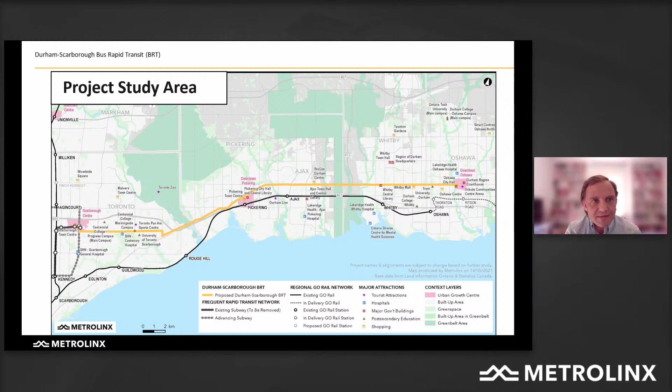Just to explain the concept behind the acronym BRT for Bus Rapid Transit: the objective is to provide dedicated lanes for the buses where this is feasible. The key here is both to be able to have shorter travel times, but mostly to increase the reliability of the transit service. We know reliability is key for a number of users.

That reliability also enables frequent service. So we're looking at a 5-minute frequency during peak hours, which can be really on the dot and provide a bus strictly every 5 minutes, not sensitive to bus bunching or things like that which would alter the quality of service for customers. Along that, there's a number of enablers that support that, including smart signals, and also a lot of connections with other TTC routes or DRT routes that will be feeding into that east-west corridor.

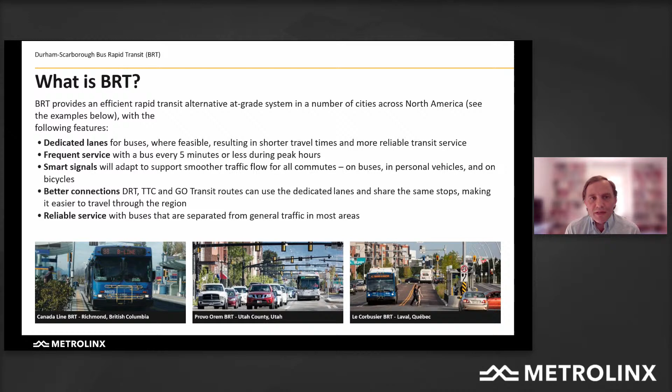As I mentioned, this has been in the works, at least on paper, for some time, and really ties in with a number of other planning exercises led by the city of Oshawa and its own integrated transportation master plan, and by Durham region. So the objective is really to provide that infrastructure spine to support the mobility hubs and the urban growth center in all of the towns that the BRT crosses in Durham region.

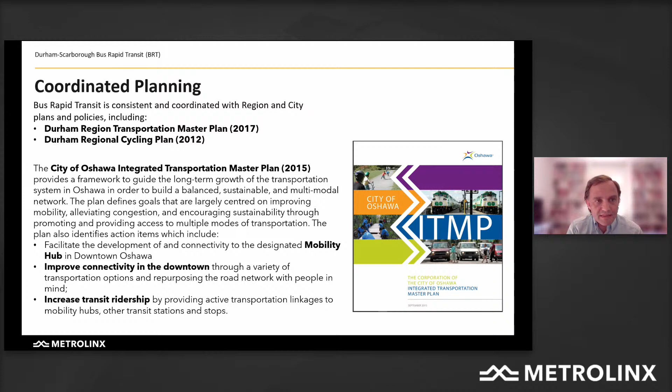The other benefit is the reduction in average bus delays. That's the reliability piece - trying to make sure that if you have a bus every 5 minutes, you basically only wait for a bus up to 4 minutes maximum, not more than that. So you won't end up having buses stuck and waiting for them for 14, 15 minutes, which is particularly important in the winter months, as we know.

There are some other benefits, such as the amount of greenhouse gas emissions that will be reduced because of that. With different forecasting models based on real demand across the region, we expect 162,000 tons of carbon dioxide to be reduced because of people choosing transit over cars. And the final benefit we focus on is the safety benefit - looking at developing solutions all along the corridor to reduce traffic accidents and injuries.

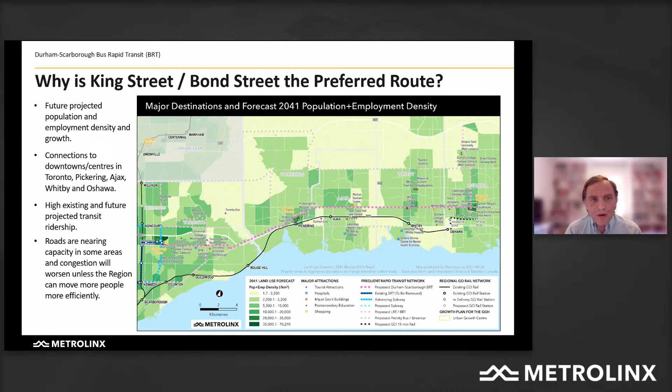And it's also supported by current ridership data. For the next slide, I'll pass it over to David to tell us more about the ridership.

Thanks, Mathieu. Based on the growth and densities Mathieu was just talking about, the two images shown here represent the current and forecasted ridership numbers on key routes in Durham. While routes like Rossland and Taunton do have considerable ridership, and future high-frequency transit routes planned on them, the highest growth in future ridership will occur along the Highway 2 and Simcoe Street corridors. These two corridors are really the proposed anchors of the transit system in Durham region and require dedicated transit infrastructure to meet the ridership demand shown here.

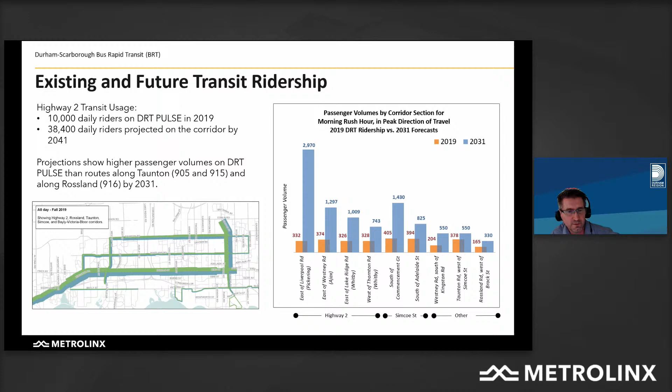While this study is looking at BRT on Highway 2, the Region of Durham will also be commencing a visioning study and environmental assessment later this year to study rapid transit on Simcoe Street. Please keep your eye out for notice of this study to get involved. Next slide please, and I'll pass it off to David Hopper.

Great, thank you Dave, and good evening everybody. So on this project, we've been working with Metrolinx, the region, and all the municipalities for a couple of years now. We started with the first round of engagement looking at the overall project plan, moving through some concepts for the corridors, and working our way down to a preferred corridor, which is where we are now.

We're getting close to a draft Environmental Project Report that is now being circulated with the various ministries for review, and that will launch our formal TPAP, or Transit Project Assessment Process, the name for the environmental assessment for transit projects, which kicks off the 120-day statutory process. We expect that to start in July and run through the end of the year.

So we've had several rounds of engagement, including tonight. There will be one more formal round once we get into the actual environmental assessment to focus on those effects and events. Go to the next slide please.

There have been a number of rounds of consultation, as I mentioned. We've had focused consultation in each of the municipalities, including in Oshawa. We've had a number of people attending open houses, looking at the website, responding back to us with comments at the events, as well as interacting with staff at those events.

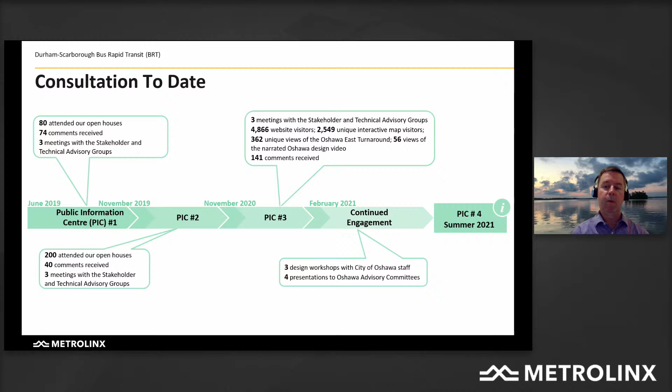Next slide please. So within Oshawa, the solution is really subdivided into 3 separate zones. Starting at the west end, at the boundary with Whitby, we see median transit lanes coming across Whitby. In fact, the median transit lanes extend almost all the way to Scarborough Centre. We'll have widened the road from 4 lanes to 6 lanes from the boundary through Thornton as far as Waverley, where King and Bond split.

The intention here is to maintain 4 lanes of general traffic for all of those people who can't or choose not to take transit.

We know that even when this line is successful, we'll carry about 30 to 40% of the trips, so we still need to provide auto capacity for the remaining people who are on the road.

The intention is the bus lanes will be in the middle with an island separating them, which will limit left-hand turns on and off King Street, both at driveways and at unsignalized side streets. This is replaced by left turns and U-turns at every signalized intersection along the corridor. There'll be a stop at Thornton, both to serve Trent University and some of the businesses in the area, as well as the north-south bus routes.

At Waverley, we will be adding a westbound left-hand turn lane and a traffic signal to allow U-turns for people coming westbound on Bond who need to get to one of the homes or businesses along there, to be able to go to Thornton and make a U-turn to come back.

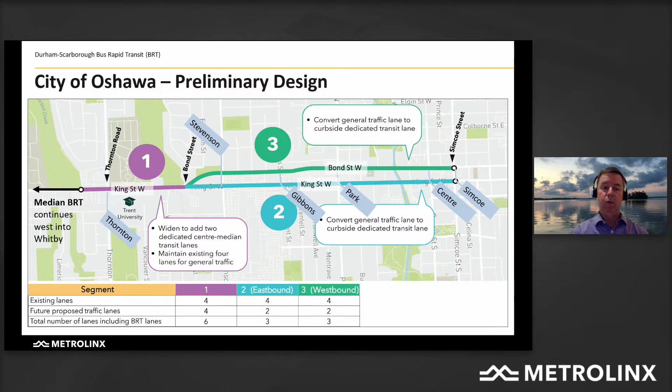And then west of Stevenson, when the bus comes around the corner towards Waverley, they'll transition back to the median BRT lanes to carry on to the west limit and out into Whitby. Go to the next slide, please.

Particularly in segment 1, this is a blow-up in more detail of the stop at Thornton. We can see the two bus platforms shown here in blue. They're on the far side of the intersection, so when the buses approach, the smart traffic signals will know the bus is coming and will either hold the green light or change the light so the buses stay on schedule. They'll go through the light and then stop and have all the passenger interaction at the stop, and then as soon as they're ready, they can depart and keep rolling.

We have dedicated left turn U-turn lanes as well. For safety reasons, we're replacing the left turns across the bus lanes with concentrated left and U-turns at signalized intersections. So left turns and U-turns will function much like advanced left turns today. They will be the only traffic that's moving. And we found on Viva and Highway 7 that this is actually significantly safer than the road we see today.

When we looked at the traffic volumes, we see upwards of 1,000 cars per hour today traveling through here, which is more than can be handled by one lane of traffic. Our projections out to 2041 indicate somewhere between 1,200 and 1,400 cars an hour. To put that in context, a single lane of urban roadway can carry about 800 cars.

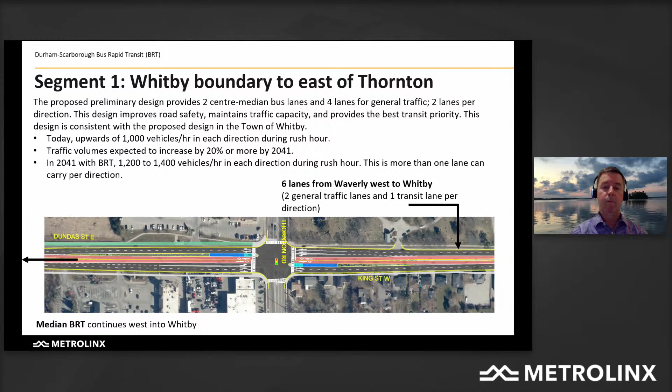So while we are looking to improve transit and improve reliability and encourage more people to take transit, we are also trying to limit traffic infiltration into local neighborhoods by providing enough capacity on King Street in order to handle the traffic. Go to the next slide, please.

So here's a schematic of how the turns would be made. If you're traveling westbound, you'd be following the yellow path. Instead of making a left-hand turn directly off King into your local side street, you would proceed to the next traffic light to the west, use the dedicated U-turn movement, come back around, and then turn right into the local side street.

As part of Vision Zero, widening roads out to 6 lanes really does require a median down the center to help reduce collisions, particularly with transit infrastructure where the speed of buses might be slightly different than the speed of traffic at rush hour. It also improves the pedestrian experience because you're not watching for as many conflicting moves crossing a side street, and it improves facilities for cyclists, which will be provided along most of the corridor paralleling the BRT.

As I mentioned, York Region saw a 51 to 74% reduction in collisions along the corridor, primarily due to the change in left turn traffic. Could I have the next slide, please?

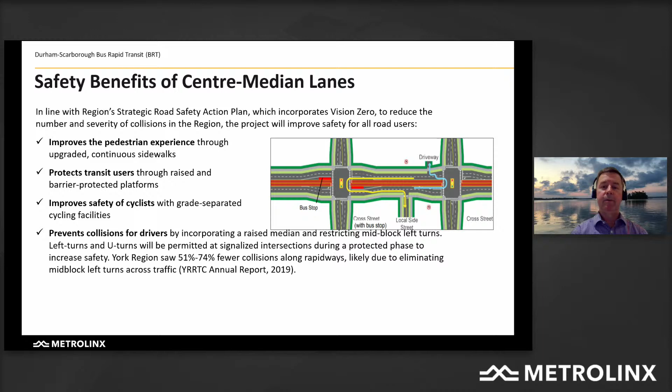This is a video put together by Viva on Highway 7. You can see the 2 red BRT lanes in the middle of the road and the stops. Each stop is at a signalized intersection so that passengers can use the traffic lights and crosswalks to get to and from the intersection.

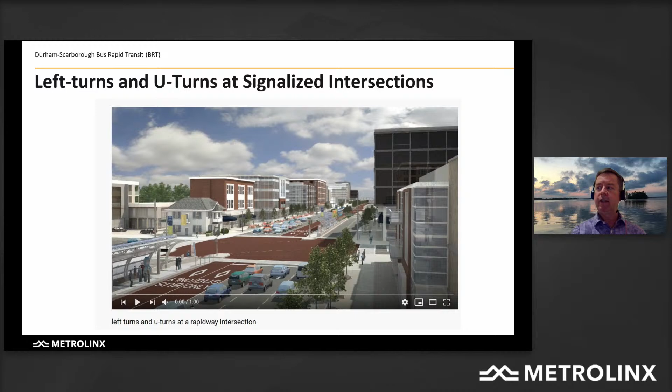Can I have the next slide, please? As I mentioned, we will be adding a traffic signal at Waverly. We have a westbound dedicated left-hand turn lane in order to serve the community south of King Street. As well, we have a dedicated left-hand U-turn lane for eastbound cars to turn around to get to the businesses on the north side or to get to the cemetery entrance.

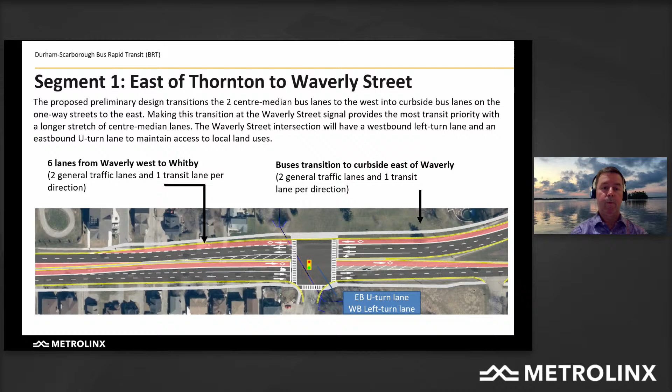We found that the traffic volumes through this area will require 2 eastbound and 2 westbound general traffic lanes as well as the transit lanes. We can see the improved sidewalks along this stretch. We'll get to the other active transportation solutions in just a minute, but we are looking to improve active transportation because we know every transit trip begins and ends as a pedestrian trip or an active trip. Could I have the next slide, please?

Once we get onto either King or Bond, this would be the lane configuration. Generally, King Street and Bond Street are 3 or 4 lanes in each direction today. The intent is to convert the curb lane, shown with red asphalt, for buses only. The other 2 lanes would be for other traffic. The reason we're doing this is that it will allow us to widen the sidewalks, to provide sidewalks that are more up to current accessibility standards.

We have looked to see that the traffic can be accommodated by the 2 remaining traffic lanes. It does maintain left and right turn access across the bus lane in this particular area. It avoids a lot of impacts to adjacent buildings, and it definitely minimizes impacts both to cultural heritage as well as the downtown character in downtown Oshawa. Could I have the next slide, please?

In segment 2, we're operating eastbound on King Street. We can see the stops at the circles, at Stevenson, Gibbons, Park, Centre, and Simcoe. In this stretch, we see about 1,100 vehicles per hour in the afternoon, increasing to around 1,300 to 1,500 by 2041, which is still easily handled by 2 general traffic lanes. Once we get beyond Simcoe Street, the buses will move into mixed traffic operation as far as Ritson, as I mentioned earlier.

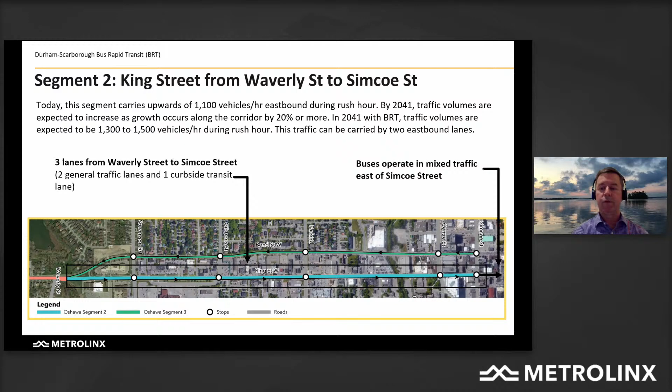See the next slide, please. Similarly, once the buses have turned around, they will head back into the dedicated transit infrastructure starting at Simcoe Street. The same 5 stops are mirrored from King to Bond. In this stretch, we see heavier traffic in the morning. Today it's around 1,000 vehicles an hour, and by 2041 we see this increasing slightly less than the eastbound, in the 1,200 to 1,400 range, which can very easily be handled by 2 lanes of general traffic westbound. Could I have the next slide, please?

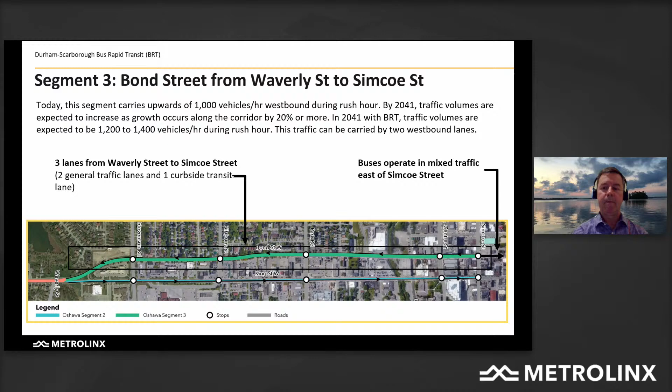So this is a bird's eye view looking down at the King and Bond intersection, at Park Street. We see Bond Street on the left-hand side with buses coming towards the bottom of the photograph, the stop on the far side of the intersection, and the dedicated red asphalt lane for the buses.

We also see a dedicated right-hand turn lane on the far side of the bus lane. Where volumes warranted, we've tried to include right-hand turn lanes. On the right side, King Street eastbound has a far side stop and a dedicated right-hand turn lane, because Park is such a major north-south thoroughfare. Some other streets don't have dedicated right-hand turn lanes, in which case cars would be allowed to use the BRT lane for a specific portion in order to facilitate right-hand turns.

Can I see the next slide, please?

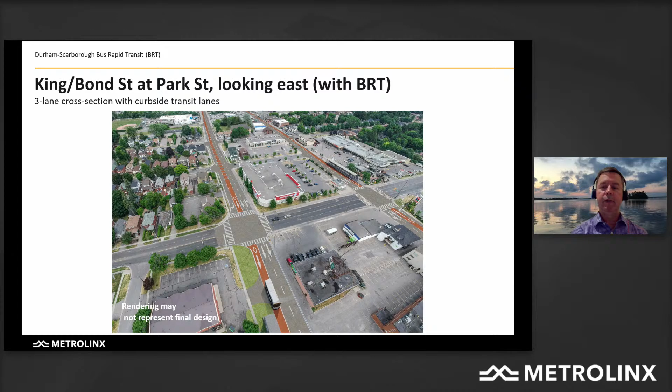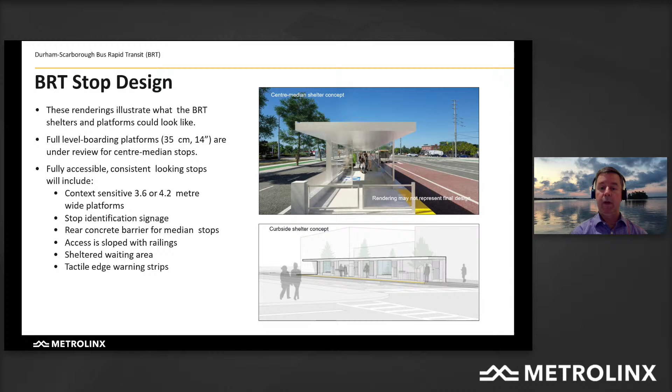Can I have the next slide, please?

We do recognize that taking away or dedicating transit in the curb lanes on King and Bond in downtown will have an impact on parking. We are looking to minimize or eliminate that impact, and we're working with the City of Oshawa to find some solutions for this on-street parking.

We will see some spaces on Bond Street. We lose one on the north, but we can gain some on the south side of Bond. King Street is a little more challenging, and we may lose as many as 13 parking spaces.

To put that in context, there are 919 on-street parking spaces downtown and almost 2,300 in off-street parking lots. So even if we are not successful in finding replacements for all of them, that's actually a very small percentage of the number of spots that are available. But I said we are working with city staff to find ways to replace all of the on-street parking.

Could I have the next slide, please?

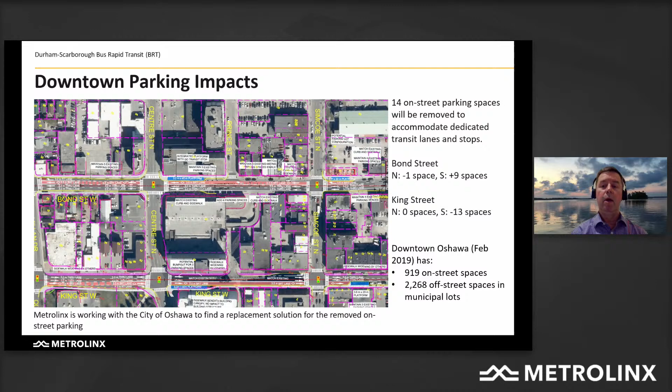So once you get to the curb it will rise up. There'll be a boulevard, then a cycling lane, and then a sidewalk outside of that. There are a number of pinch points like downtown Oshawa, downtown Whitby, Pickering Village, and the bridge over the Rouge River, where there just isn't physically enough space for the cycling infrastructure to be immediately adjacent to the BRT lanes.

In those cases, we're working with the local active transportation plans to make sure that we have parallel routes that are as close as possible and tie in with the dedicated infrastructure. In the case of Oshawa, the intention is to use Thornton to tie north to Adelaide and south to Gibb as the primary alternate routes.

With the wider sidewalks and with the curb lanes, there may also be people who choose to continue to cycle along King and Bond, and that activity will be better than it is today doing that same operation in mixed traffic.

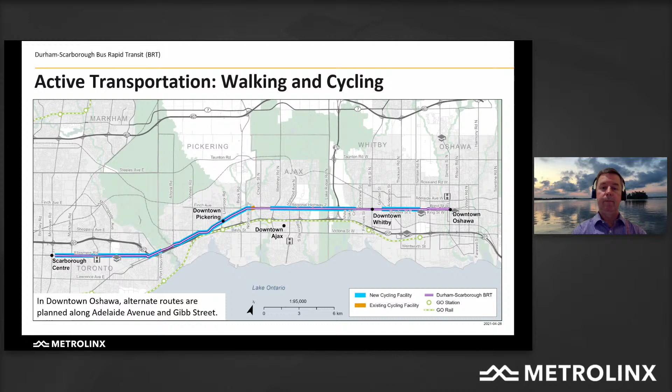So what are the benefits of BRT? What we're doing is we're improving about 5 kilometers of sidewalk within Oshawa to bring it up to a modern standard. We will be replacing the 2 bridges over Oshawa Creek to include accessible sidewalks on both sides of the bridges. We're also looking to make sure that the north-south pathway down at creek level can be accommodated.

We're looking at improving the reliability of transit through downtown, particularly on days when the weather is bad or when there are delays on Highway 401 and traffic is diverted. We're looking at how this actively connects to the proposed Simcoe Street corridor to make for a seamless transfer if necessary, and also to allow for buses to interline and run on both Simcoe and King and Bond.

We're looking at maintaining adequate general traffic capacity throughout Oshawa to make sure that we don't drive traffic onto local neighborhood streets. We're looking at how that will minimize infiltration.

We're looking at how to improve the public realm along the corridor to help improve attractiveness for pedestrian activity in the downtown, to provide greater access to businesses and more opportunities for streetscaping. And what we're seeing in all of this is this will tend to attract development, it will attract retail, it will attract pedestrians, and provide the growth that we want to see in the downtowns.

One of the studies that we have seen is the King Street streetcar pilot in Toronto. Initially, there was some negative press around this, as it takes a while for people to get used to new transit solutions. But what we're seeing, in the second year of the program, is we're actually seeing an increase in retail spending along that corridor. The mix of businesses is changing slightly, but we're actually seeing a positive economic benefit along that corridor.